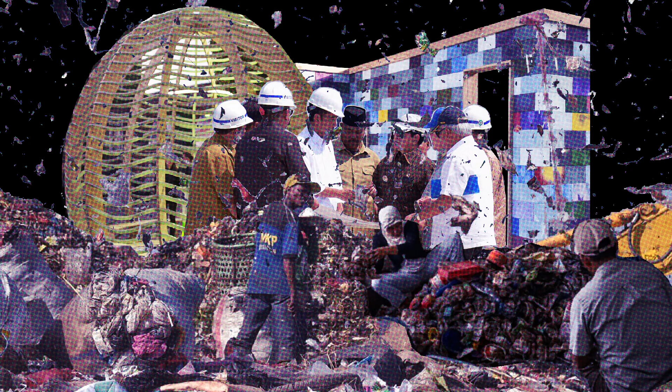Concurrently, the constant rising sea level has forced the government to move the sinking capital to the neighboring island of Borneo, leaving behind the most marginalized poor in the sinking capital. With millions of its residents in danger, the government has no choice but to accept the new proposal of building a new micro-city stemming from the old capital.

This micro-city is based on 4 ecosystems. Firstly, recycling as the main building block for the community, as well as its primary source of energy. Next, algae is used for the production of clean water and air. For food sustainability, aquaculture and hydroponics are used. Finally, the housing ecosystem, making it a livable society.

Using the distinctive layers of the existing city, a site analysis was performed to determine the suitability of different areas within the site. From this, the areas where the ecosystems are to be anchored onto were determined. These main anchor points are then used to generate a mesh that allows for a flexible yet controlled growth of each ecosystem. The various elements are entirely connected, forming a closed-loop ecosystem, where the recycled waste is then used for building the main infrastructure system.

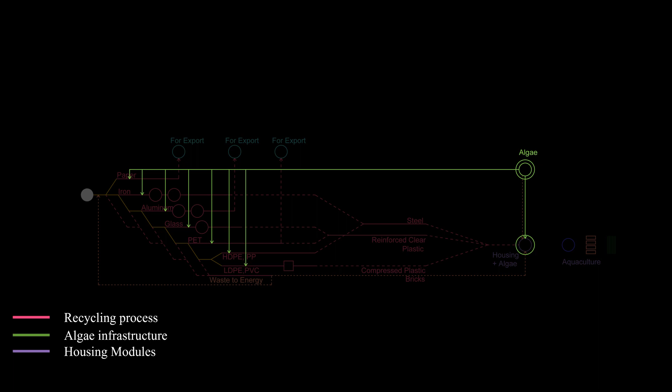The algae ecosystem acts as a mediating element as it cleans and processes the wastewater for daily use. The main recycling processes are represented in pink, forming the base of the ecosystem, leading to the yellow zones where the upcycling happens. The green then represents the microalgae infrastructure for the production of clean water and biofuel. The housing grid is located between each of these algae spines, where the living spaces and aquaculture intertwine.

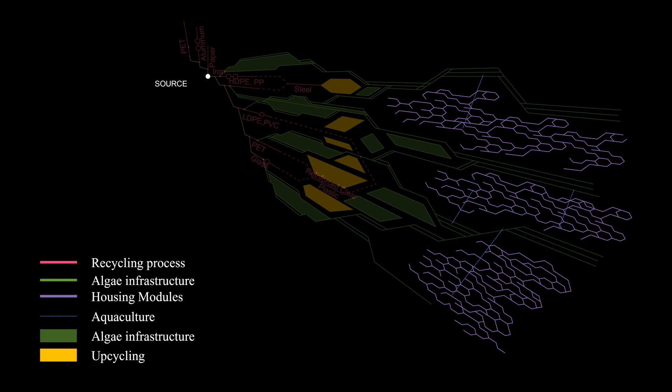2030. The capital has moved, leaving behind the poorest of the poor. In the first phase, the recycling facilities will be set up together with the microalgae infrastructure. This makes up the base groundwork for the community to grow.

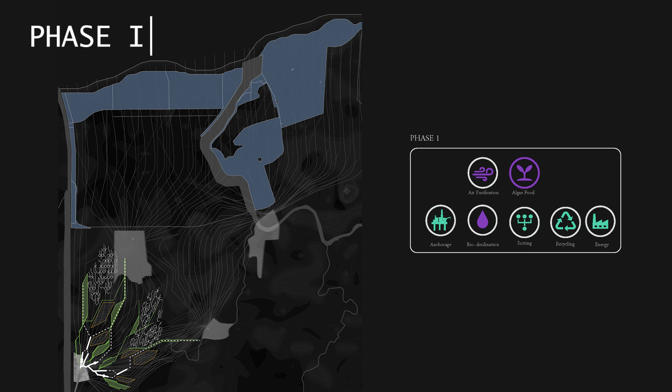Concurrently, the city will start to clear up the areas closest to the coastlines as the threat of rising sea levels encroaches. The waste material that has been generated within the area will be brought closer inland into 3 main waste consolidation zones.

2050. In the second phase, sea levels will begin creeping further inland, and the waste consolidation zones will start accumulating. New ecosystems will then start to grow from the waste consolidation zones. At the same time, these areas within the vicinity will be torn down, generating resources for more communities to form.

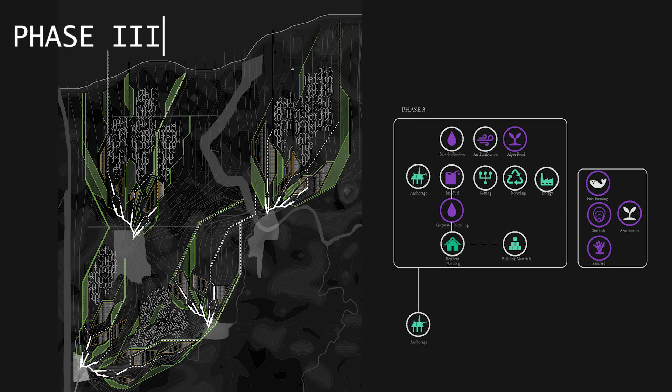2080. As more communities start to join, clusters will start to grow from the waste consolidation sites within this area. As the farming communities rejoin the housing clusters, aquaculture will thrive yet again.

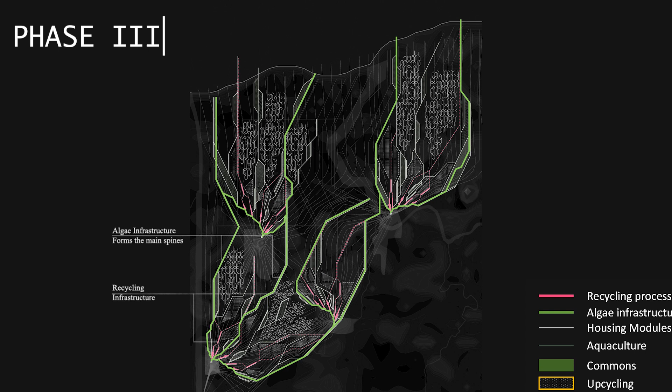Moreover, each of the communities will be further connected as the main algae infrastructure housing the commons continues growing. This algae infrastructure forms the main highways of connection within the site, steadily forming an interconnected network of different systems as the community starts reclaiming the area that has now been lost to the sea.

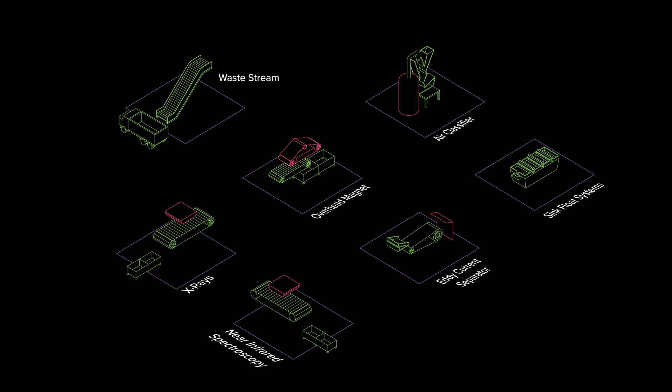Waste sorting. The heart of this project is the sorting process, where the waste is sorted into its base components through the use of sophisticated processes. These processes are strategically linked to allow for an effective sorting of materials.

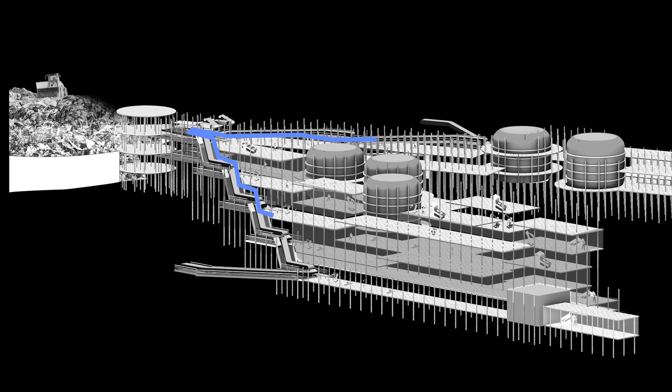A combination of sorting and recycling processes allow for the waste to be sorted and recycled into the main components, ready to be used as raw materials. This cascading infrastructure allows for the waste to be sorted efficiently, as they are directly channeled to the respective recycling systems, funneling the waste downstream.

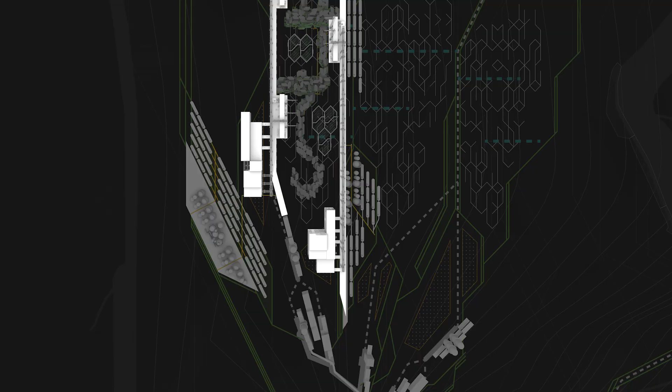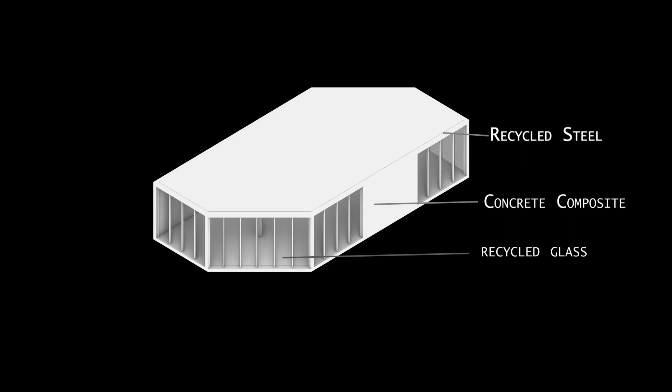Upcycling. The upcycling consists of three main upcycling plants: the steel upcycling plant, the glass upcycling plant, and the composite recycling plant. The materials made are then transported to the temporary assemblage modules where base infrastructures are built. Each building block is made up of three predominant materials: the base structure made of concrete composite, recycled steel, and glass.

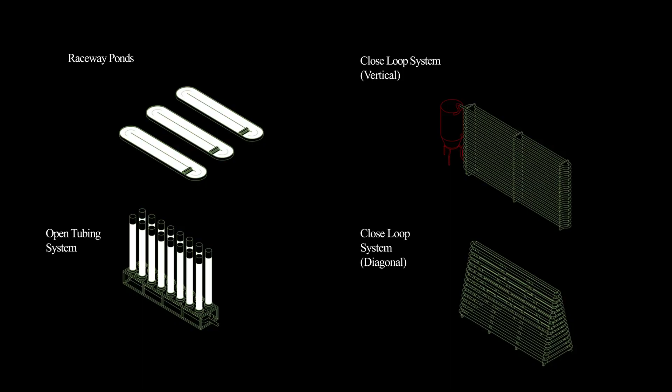Algae infrastructure. The algae infrastructure acts as a bridge between the productive systems and the living quarters. Different algae cultivation systems are deployed to cater to the specific needs within the ecosystem. The algae infrastructure consists of three fundamental systems.

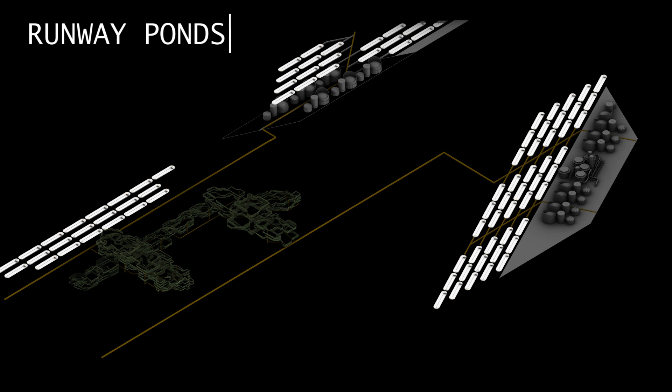1. The algae runway ponds. 2. The algae closed-loop system. 3. Algae processing system. The runway ponds serve as a base cultivation where seawater is desalinated to produce clean water for use within the productive system.

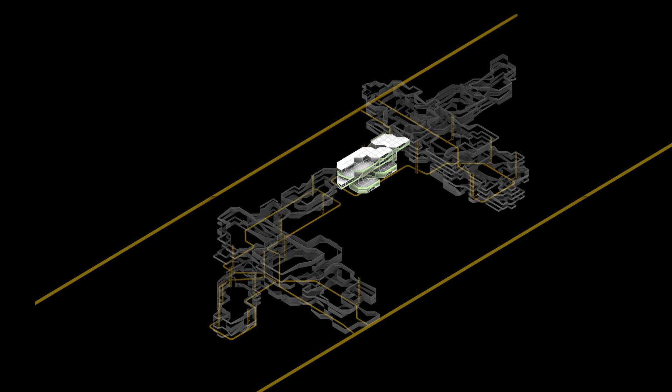The closed-loop algae system is designed based on the volumetric need of each living cluster, where all the loops are connected back into the main algae system. Each loop caters to one living cluster where grey water collected will be processed by the microalgae before it is reintroduced. All the different systems are linked together through the processing plants.

Each processing plant houses a research center where algae technology is researched and developed. One example is the upcycling of the byproducts in the cosmetic industry.

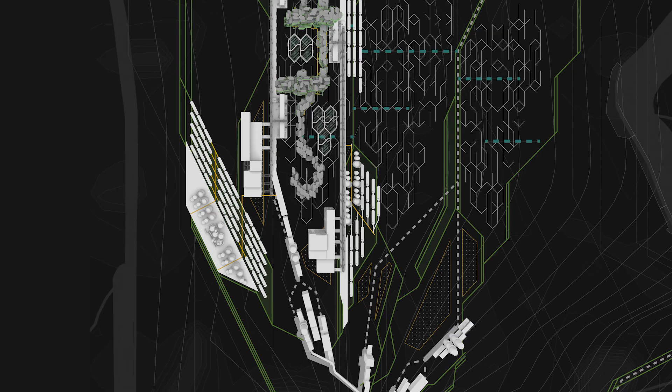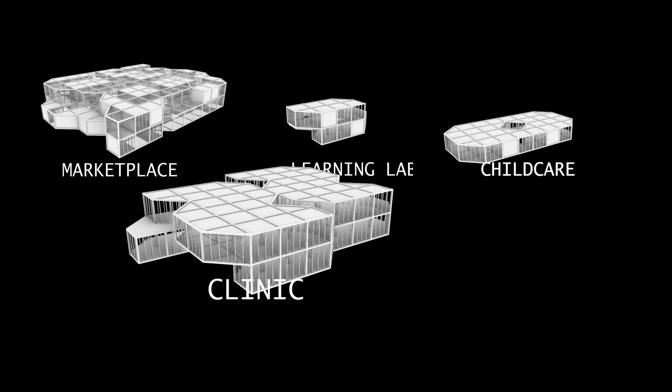Commons. The Commons are made up of 5 programs: the Marketplace, forming the base of the Commons; the Learning Labs, where residents can learn more about different recycling processes and the algae infrastructure; childcares, clinics, and entertainment centers make up the remaining 3 programs. Within the Marketplace at the base, the Commons are agglomerated, catering to the growing need of the community. The Commons also serve as a bridge between the productive spine and the housing modules.

Let's take a closer look into the Marketplace.

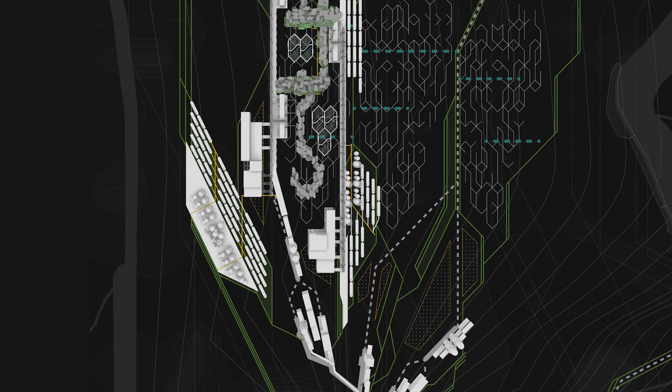Housing. There are 8 different housing configurations, catering to different types of family. A range of different housing typology, from studio apartment for transient workers to larger apartments catering towards bigger families. The housing grows from the commons as more people move into the safe haven of this new microcity.

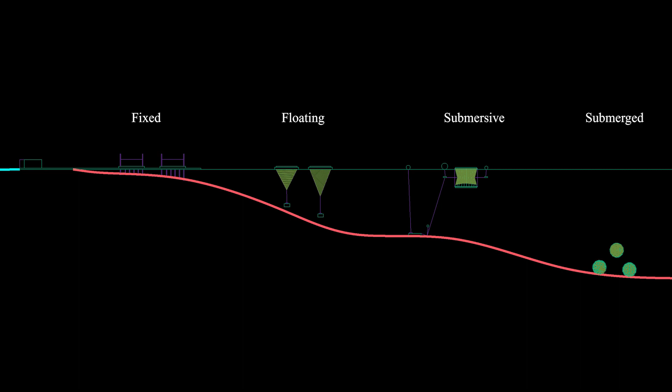Within the enclave of the housing infrastructure, the algae infrastructure also acts as a second skin, controlling the amount of light that is being let into the house. Aquaculture is practiced. Through the analysis of diverse aquaculture systems, seaweeds and mussel cultivation were chosen due to their suitability in shallow seawater. The aquaculture modules allow for the community to cultivate their own food, allowing them to be self-sustainable. Let's take a look into how people are living within the community.